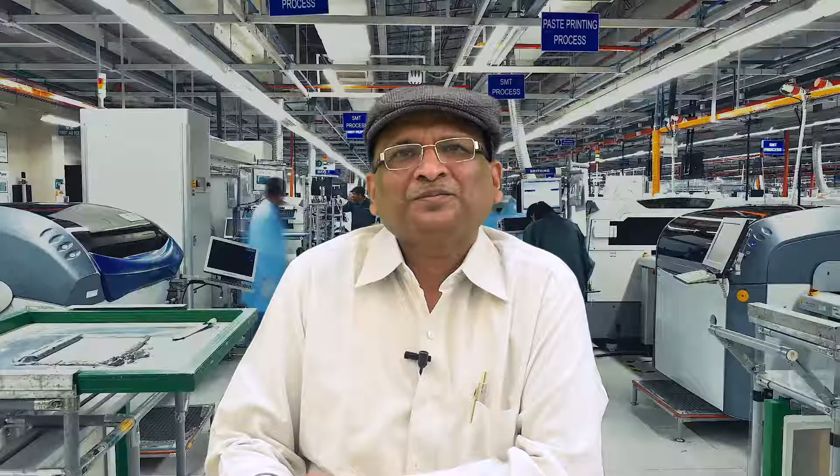When we discuss capacity planning, it is very important that we know the sequence of activities. First, through forecasting, we have customer demand. Then, through aggregate planning, we have production planning. And then finally, with MRP and capacity planning, we decide what capacity is required at our end. The management must plan the capacity of its process after deciding what products or services should be offered and how they should be made.

Capacity means the maximum rate of output for a process. Under capacity planning, the operation manager should have the decision-making capacity to cope up with present and future demand. Otherwise, the organization will miss the chance of growth and profit.

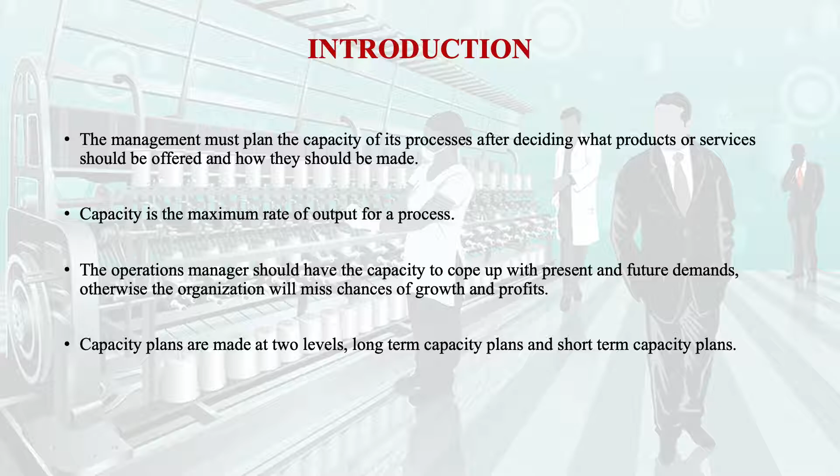Under capacity planning, there are basically two levels: first is long-term capacity plan and second is short-term capacity plan. Under the long-term capacity plan, we deal with investment in new facilities and new equipment, and these plans extend at least up to 2 years in the future.

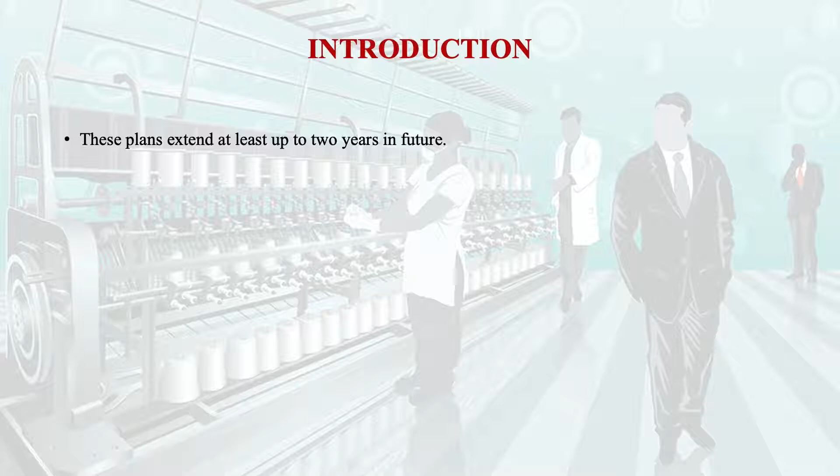Most Indian firms invest more than 600 billion yearly in new plant or equipment. Similarly, the service industry accounts for more than 68% of total investment. Such large investment requires very good management participation and approval because it cannot be reversed.

Short-term capacity plan focuses on workforce size, overtime budget, inventories, and other types of decisions that we will explore in later chapters or video sessions.

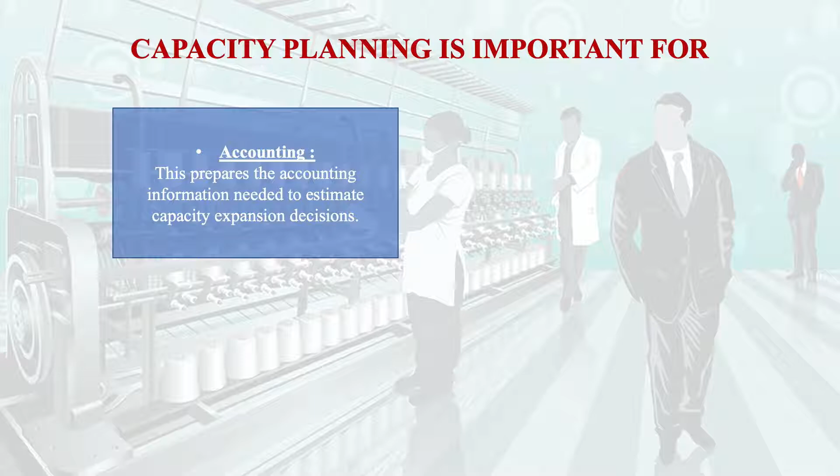Why is capacity planning important? It is important for accounting because it prepares the accounting information needed to estimate capacity expansion decisions. In finance, it performs a financial analysis of capacity expansion investment proposals and raises funds to support them. In human resources, it hires and trains employees to sustain the capacity plans.

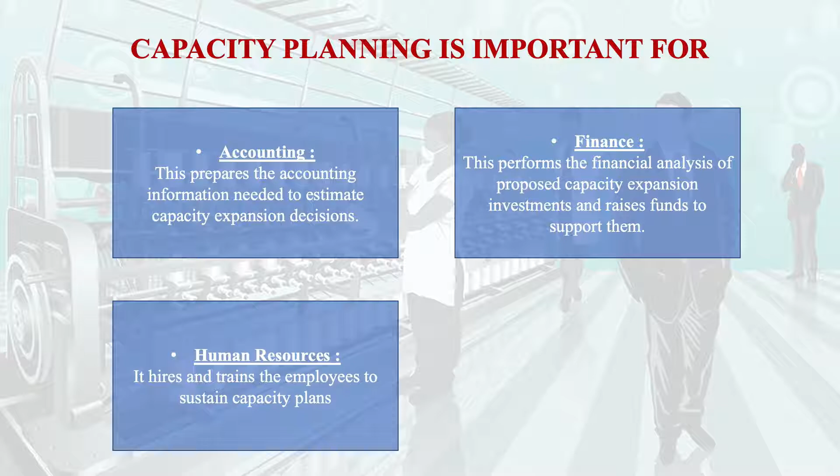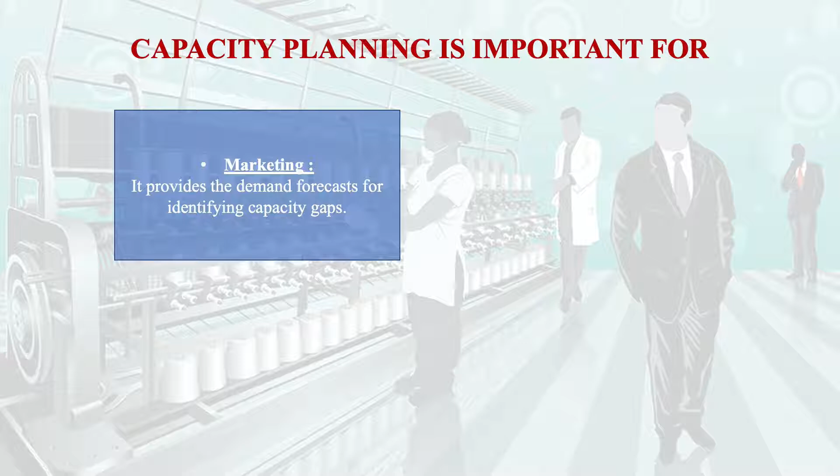In management information systems, it designs the database used in determining the work standard that helps in calculating capacity gaps if they exist in the existing plan. Then the most important is marketing, which provides the demand forecast for identifying capacity gaps. Then comes operations, which selects the capacity strategies that provide capacity levels to meet future demand most effectively. And then purchasing, which obtains outside capacity that is to be outsourced.

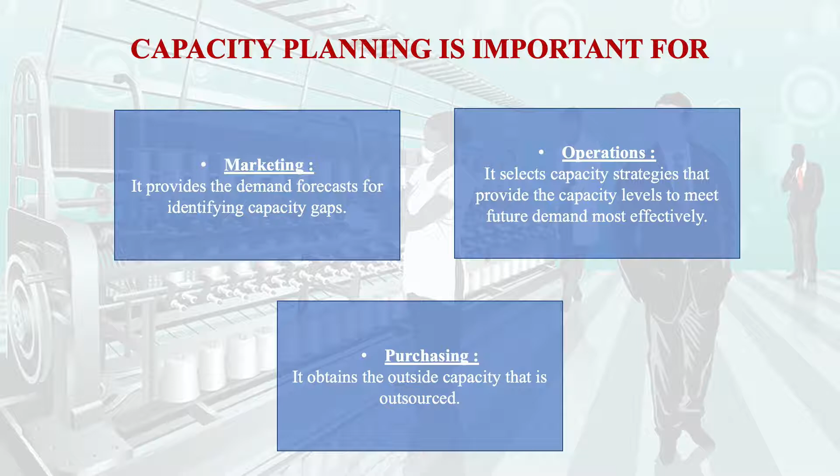Capacity planning is basically the central idea behind the success of any organization in the long run. While choosing the capacity strategy, the manager has to consider certain things in mind, such as how much cushion is needed to handle variable or uncertain demand.

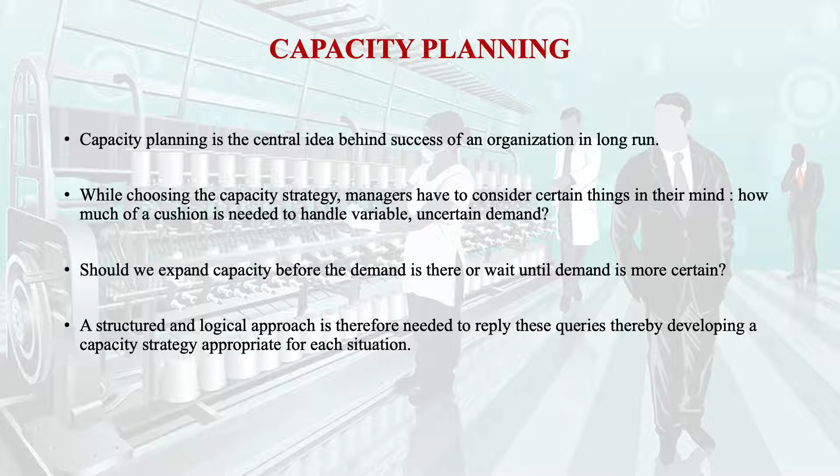Under the capacity plan, we also ask: should we expand the capacity before the demand, or should we wait until the demand is more certain? A structured and logical approach is therefore needed to answer these queries, thereby developing a capacity strategy appropriate for each situation.

So in today's session, we are going to learn the measures of capacity, how you will measure the capacity. We will also learn theory of constraints, though it will also be covered in a separate session. Then we will discuss economies and diseconomies of scale in case of capacity planning.

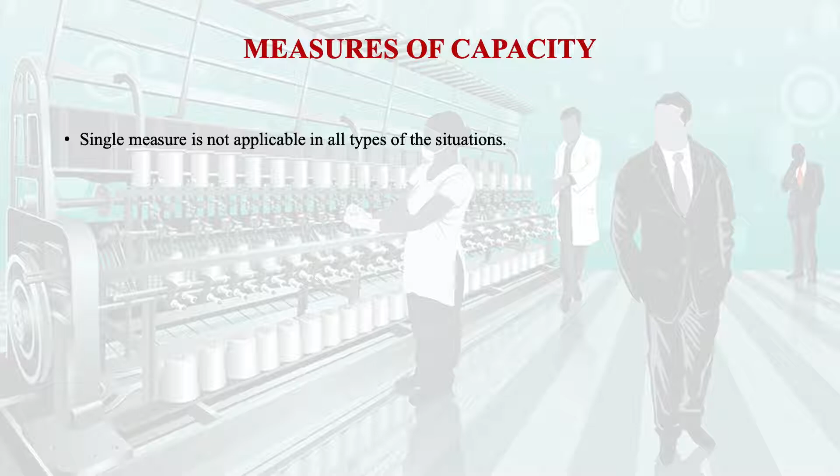The first important area under capacity planning is the measure of capacity. A single measure is not applicable in all types of situations. A retailer measures capacity as annual sales in rupees generated per square meter. Similarly, an airplane or airport authority measures capacity as available seat kilometers per month.

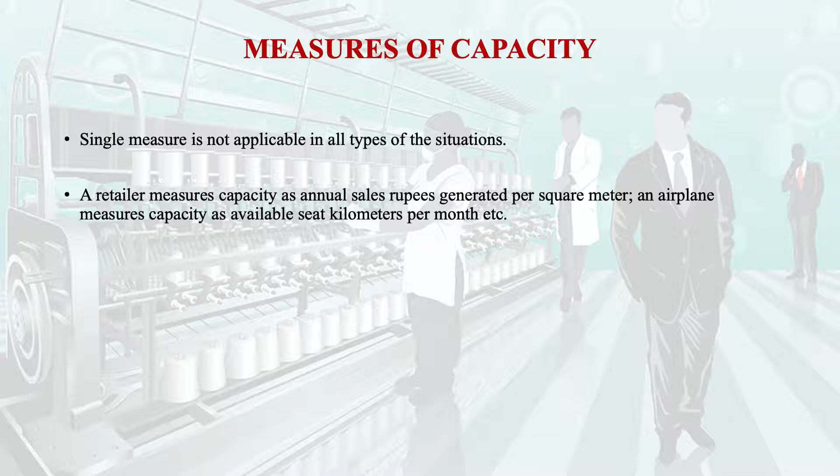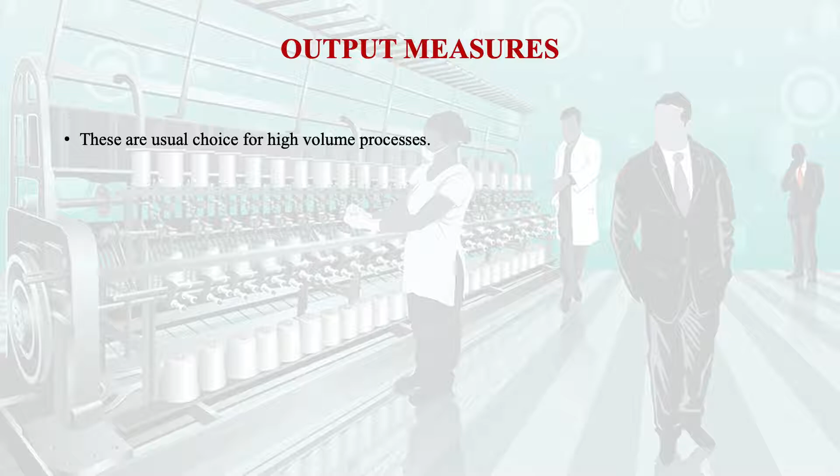In general, capacity is expressed in one of two ways. The first is the output measure, which is the usual choice for high volume processes. If a plant produces only a single item, for example a single type of vehicle, the measurement of capacity is very easy.

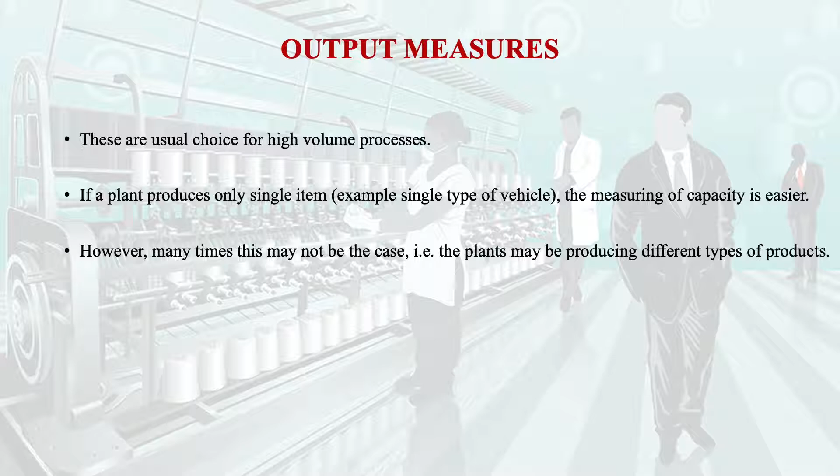However, many times this may not be the case, and the plant may be producing different types of products. For example, take any car manufacturer—they are not producing only one segment. There may be the economical car segment, medium class segment, higher class segment, and the luxury car. Besides that, there may be heavy duty vehicles. So all these are different.

Then what will be the output measure? We will decide that if it is an 800cc car, we will say it is 0.8 unit of passenger car. If it is a Wagon R type, we will say 1 unit. If it is a Ritz or Swift type, we will say 1.2. And similarly, for a higher class or even luxury class, we can say 2 units.

The car manufacturer will say that they are going to manufacture so many units of passenger car. They will not say economical car so much, medium car so much, higher class car so much. No, they will simply say this much unit of passenger car.

Under the output measure, as the amount of customization and variety in the product mix becomes too much, output-based capacity measure becomes less useful, as quoted in the example of the passenger car. Output measures are best used when the firm produces a relatively small number of standardized products and services, or when applied to individual processes within the overall firm.

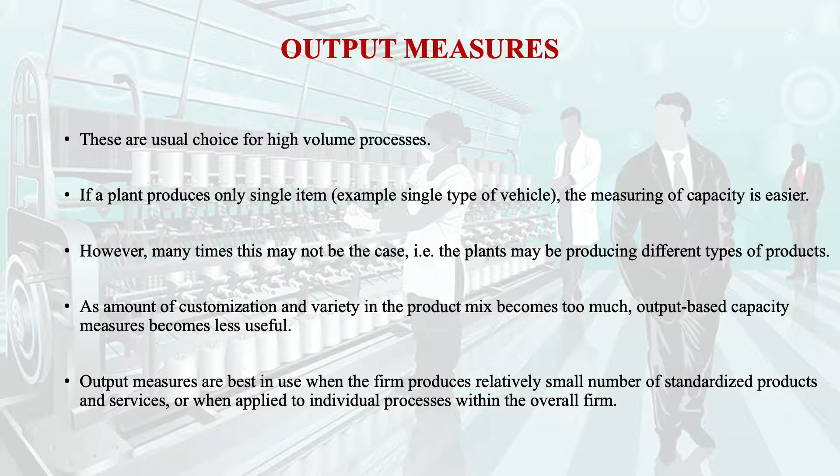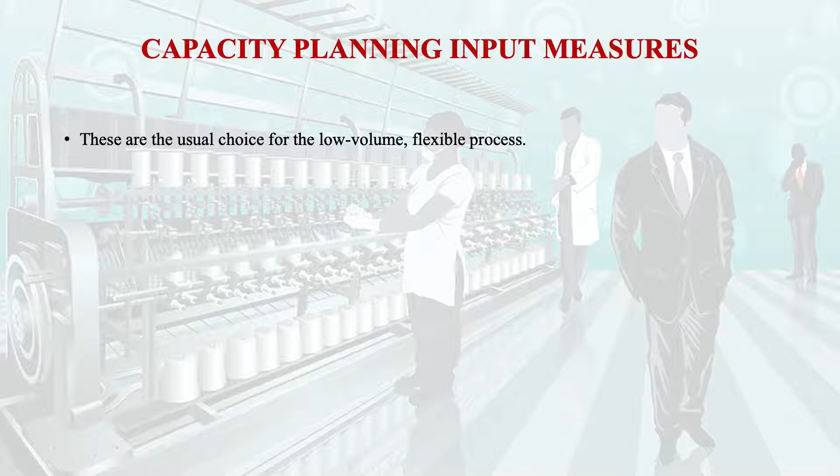Another type of measure is input measure. These are the usual choice for low volume and flexible processes. For example, in a photocopy shop, machine capacity can be measured as machine hours or the number of machines.

Just as a complicated product mix complicates the output capacity measure, the same can complicate the input measure. That means if we have multiple products, even in the case of input, the input measure will also become more complicated.

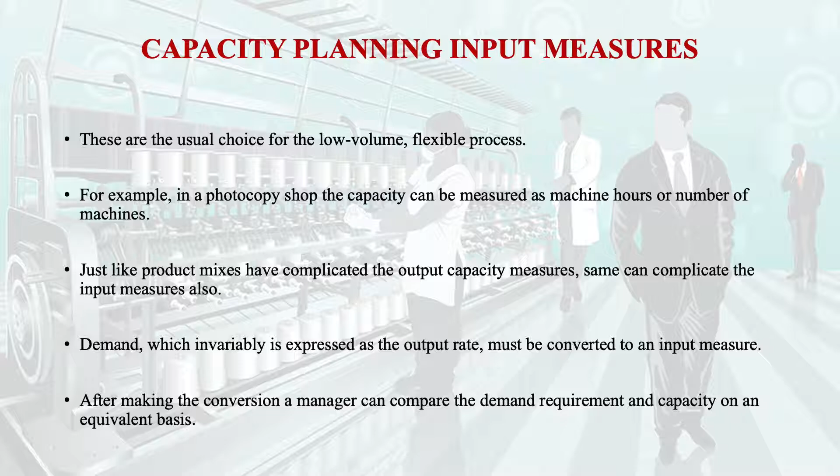Demand is important, and since it is invariably expressed as the output rate, it must be converted into an input measure. After making the conversion, a manager can compare the demand requirement and capacity on an equal basis.

Under capacity planning, an important term is utilization. Capacity planning requires knowledge of the current capacity of a process and its utilization. Therefore, utilization is the degree to which the equipment, space, or labor is currently being used.

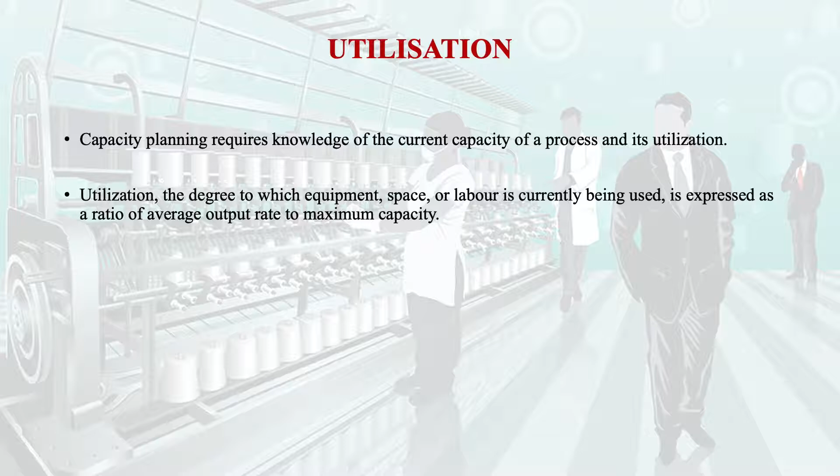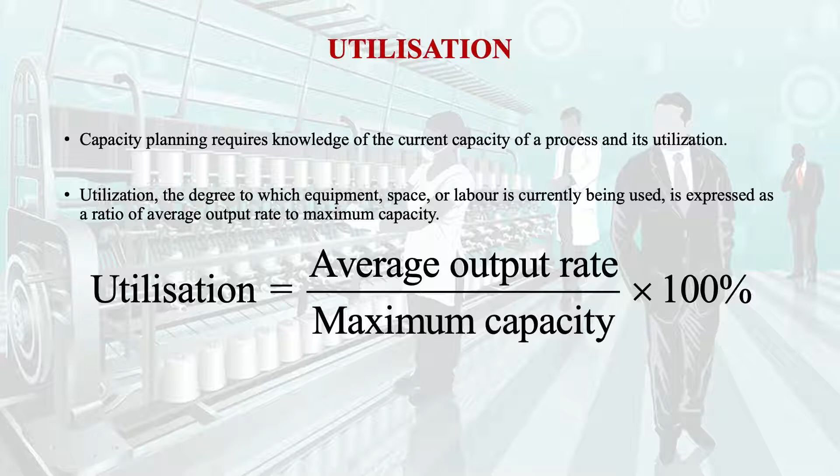If you want to express it mathematically, utilization is the ratio of average output rate divided by the maximum capacity rate, and the ratio is multiplied by 100, so we get the percent utilization.

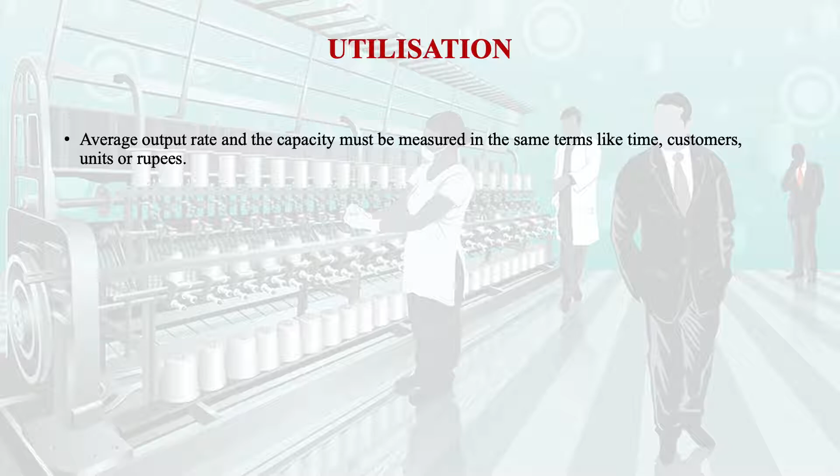The average output rate and the capacity must be measured in the same terms, like in terms of time, customer, units, or rupees. The utilization rate also indicates the need for adding extra capacity or eliminating unneeded or unrequired capacity.

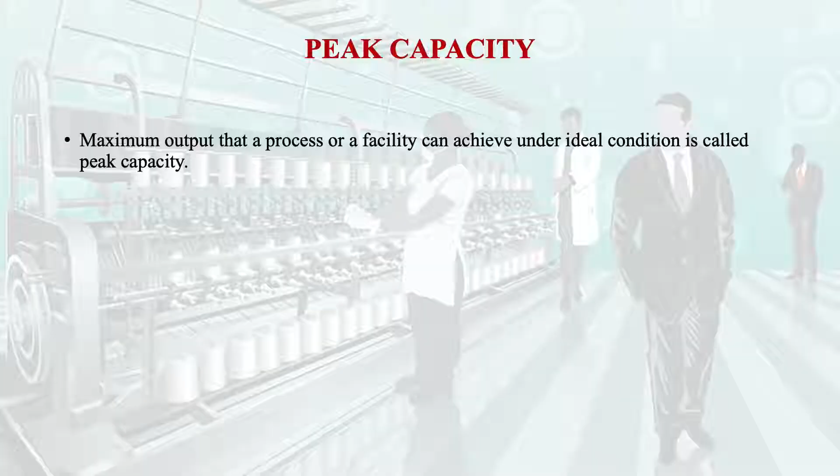We have two terms required to define the maximum capacity. The first one is called peak capacity. Peak capacity means the maximum output that a process or a facility can achieve under ideal conditions. That means if all things go well, then how much maximum can be produced, that is known as peak capacity.

That means our machine is running well, our workers are good and efficient, and all the materials are quality materials, then what output we will achieve, that is called the peak capacity.

When the capacity is measured relative to the equipment alone, the appropriate measure is called rated capacity, because it is relative only in terms of equipment.

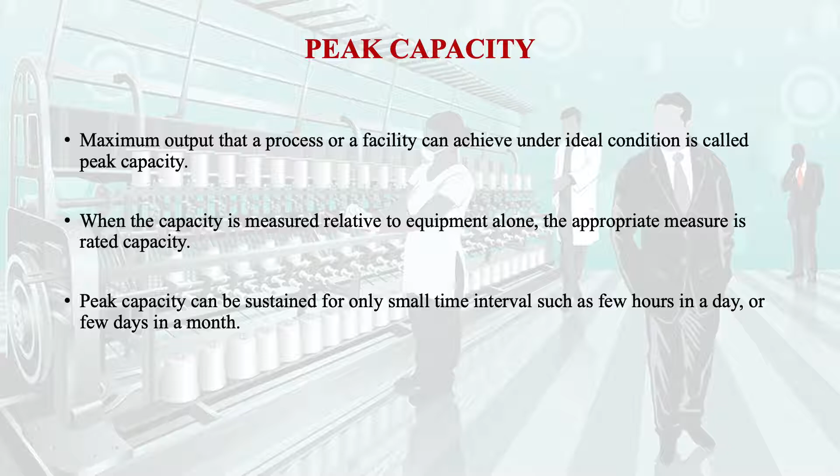Peak capacity can be sustained for only a small time interval, such as a few hours in a day or a few days in a month. For example, if production starts in the morning, as an industrial engineer you must appreciate that the worker will take time to gain the pace.

After a certain period, he will gain the pace, and at that time he will reach the peak capacity or the maximum capacity. After that, due to fatigue and the monotonous nature of work, the capacity will come down.

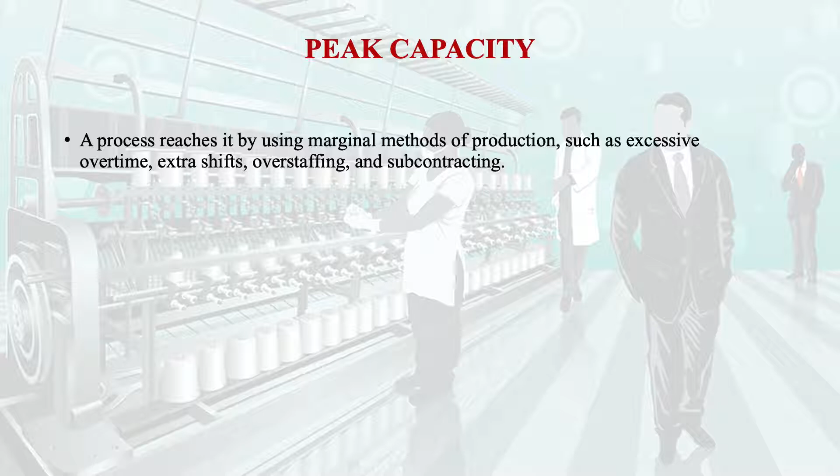A process reaches peak capacity by using marginal methods of production, such as excessive overtime, extra shift, overstaffing, and subcontracting. So these are the four types of alternatives by which we can achieve peak capacity, besides the short-term measures we used to take for achieving peak capacity.

Although these can help with a temporary peak, these options cannot be sustained for long. For example, if our demand is not going to be fulfilled, we will go for overtime, extra shift, or overstaffing. We can even go for a make-or-buy decision, that is subcontracting, so that we are able to meet the timeline.

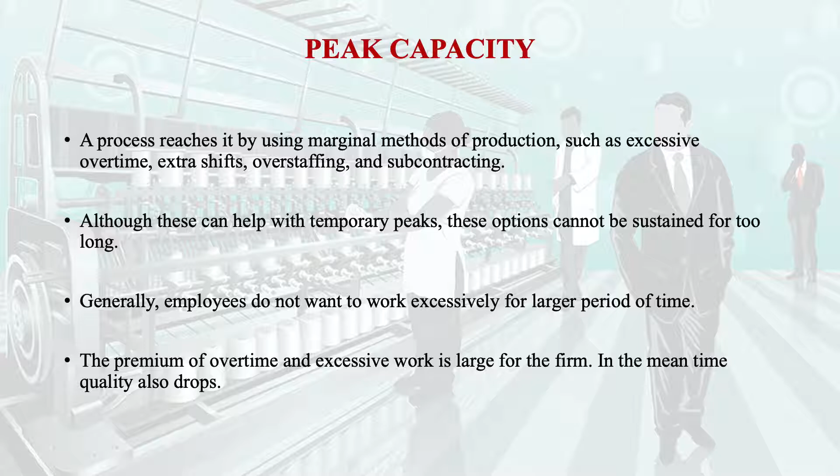Generally, employees do not want to work excessively for a longer period of time. The premium of overtime and excessive work is large for the firm. In the meantime the quality also drops. If you force the workers for extra time, for overtime, then definitely the quality will suffer.

The second important type of capacity is the effective capacity. The maximum output that a process or a firm can sustain under normal operating conditions is called effective capacity.

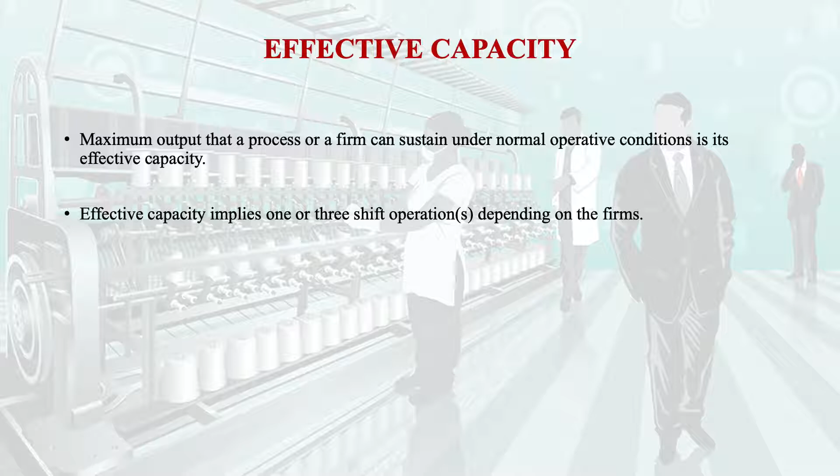When we are going for ideal capacity or ideal conditions, then we get the peak capacity. Under normal operative conditions, we get the effective capacity. That means effective capacity implies one, two, or three-shift operation depending on the firm. In a normal course, any factory normally has one shift, two shifts, or three shifts. So these are the normal conditions.

For this reason, capacity is defined as the greatest level of output the firm can reasonably sustain by employing realistic employees, schedules, and equipment currently in place. When the firm is running close to the peak capacity, it can make minimal profit or can lose money despite a high level of sales.

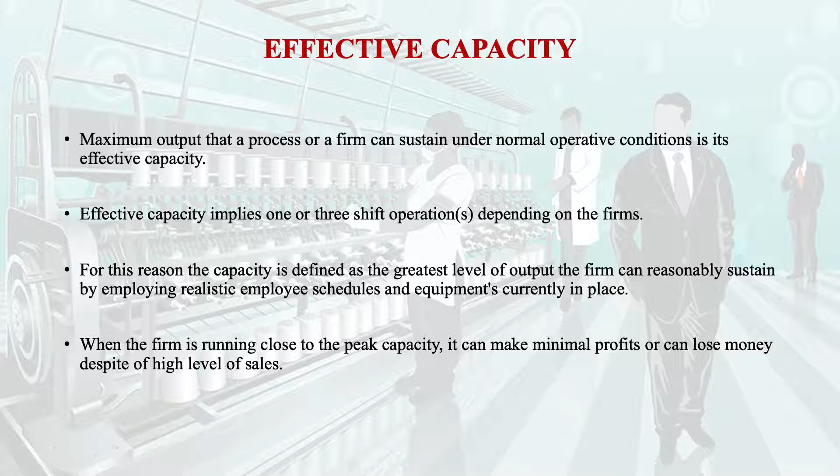So one should understand that it is easy to achieve the peak capacity, but there are some consequences when we achieve the peak capacity by overstaffing or by overtime.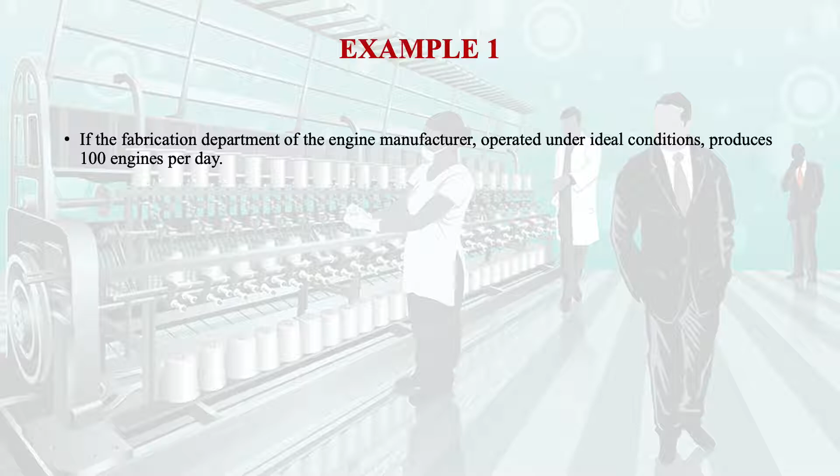If we take one example, if the fabrication department of an engine manufacturer operated under ideal conditions, it produces 100 engines per day.

Management believes that a maximum output rate of 45 engines per day can be sustained economically over a long period of time. The department is currently producing an average of 50 engines per day.

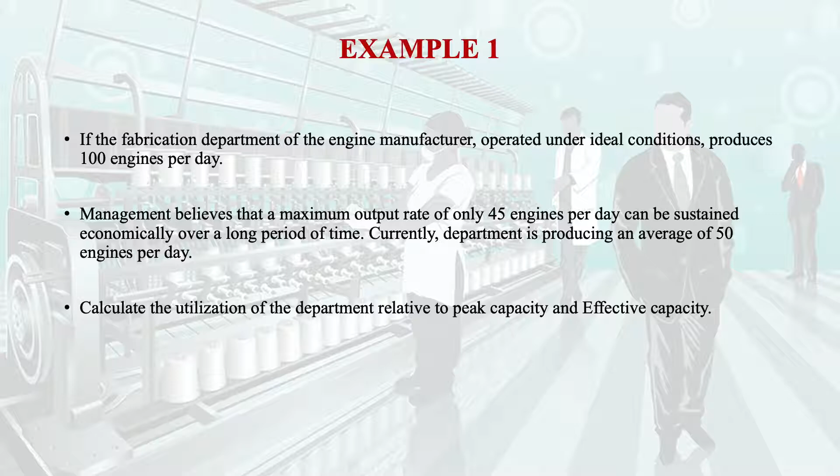So there are two different utilization measures. The first one is utilization at peak. We have 50 divided by 100, so we are using only 50%.

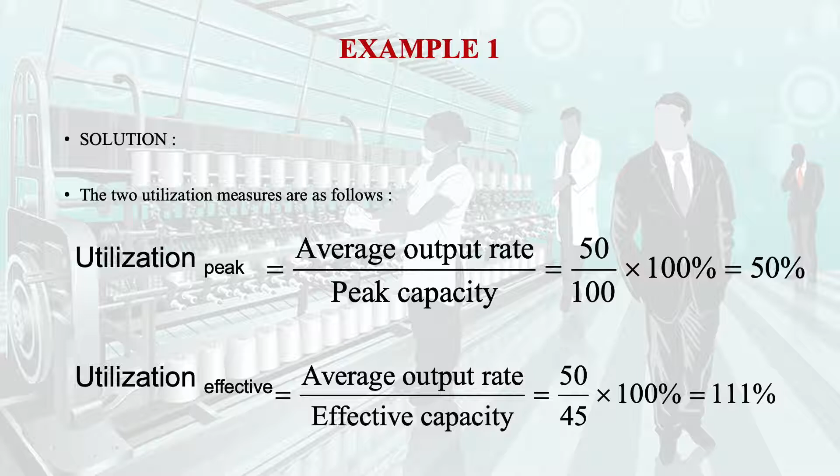In another case, when we look at effective capacity, average output is 50 and effective capacity is 45, so it is 111% utilization of the capacity.

We were discussing how to increase the maximum capacity, because that is the interest of any top management, since every time management wants to go for the peak capacity. Suppose we are working at effective capacity. Now, how will you go from effective capacity to the maximum capacity?

For performing most operations, multiple processes are involved, and their effective capacities are not identical. This is one situation. The system's output is depreciated by the bottleneck operation. The bottleneck operation is the operation having the lowest effective capacity in the process.

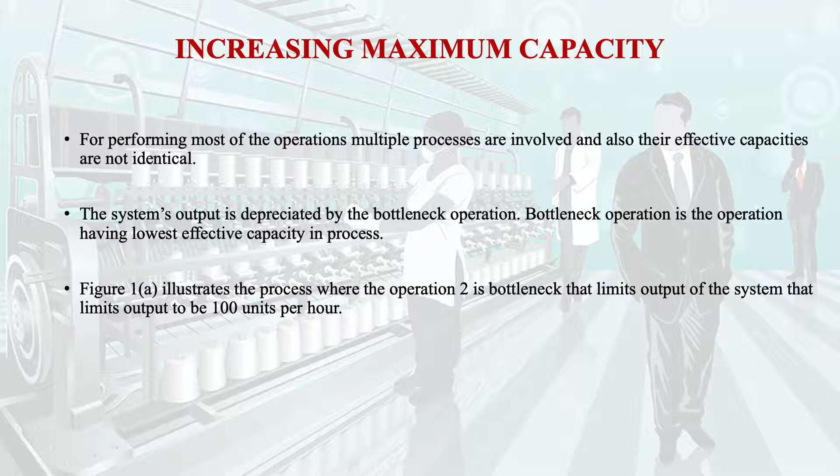So the bottleneck process always tries to hinder achieving the maximum capacity. So we have to control that bottleneck portion of the process.

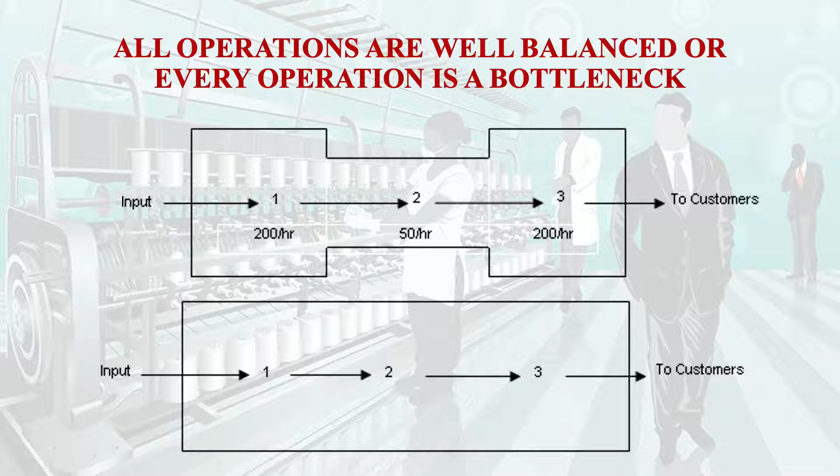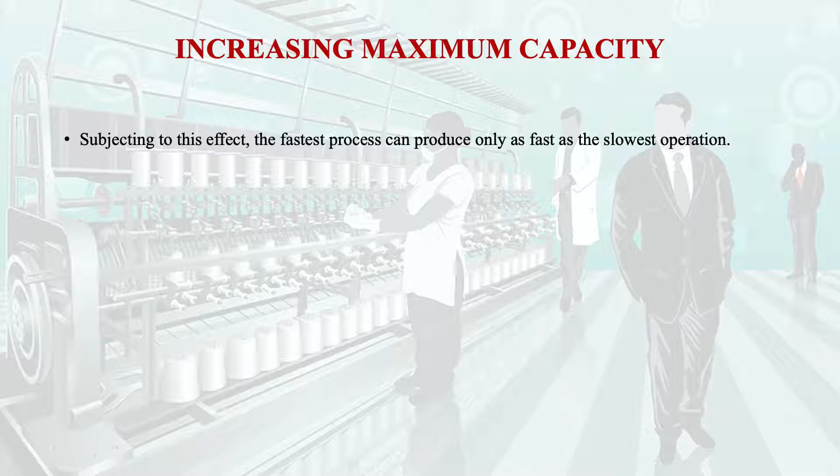Subject to this effect, the fastest process can produce only as fast as the slowest operation. Just appreciate this: if the fastest operation is producing 10 items per hour and the slowest process is producing 2 items per hour, then the speed will only be 2 items, because other items have to wait since the slowest operation cannot speed up its process.

That is why it is called the bottleneck process. We have also shown through figure 1b where all the operations are well balanced, or in other words, every operation is a bottleneck.

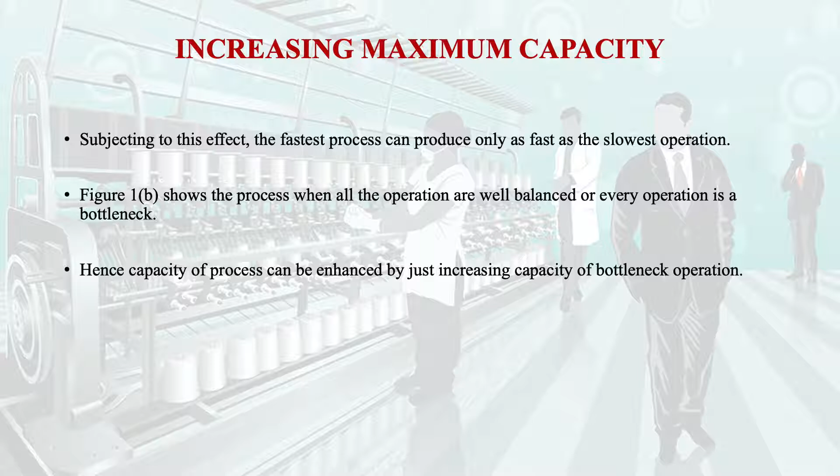Hence, the capacity of the process can be enhanced by just increasing the capacity of the bottleneck operation. We have also seen that if we increase the capacity of operation 2, which is the bottleneck, without disturbing the operation capacity at points 1 and 3, then we can increase the total output capacity.

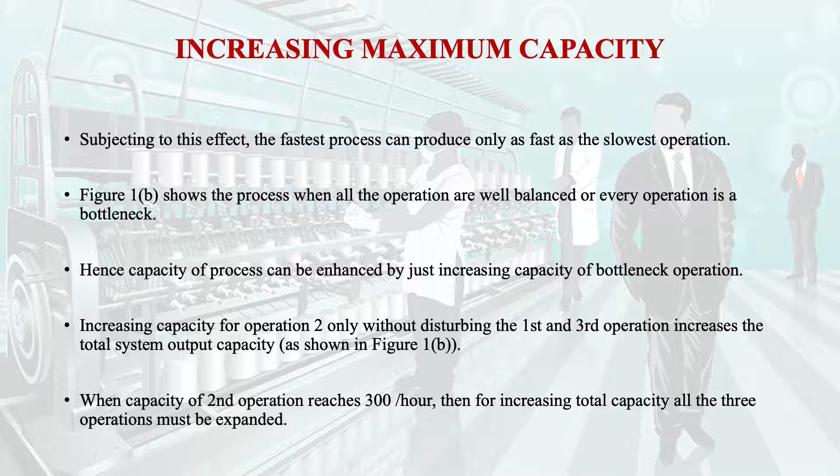When the capacity of the second operation reaches 300 per hour, then for increasing the total capacity, all three operations must be expanded. Here I just want to clear one thing: when we are increasing the capacity of the bottleneck, that should be synchronized with the other operations also.

Now we will just see what is the theory of constraints. There will be a separate video session on the theory of constraints, but since the theory of constraints is a very important topic in capacity planning, that is why we are taking a brief or short overview of that theory of constraints.

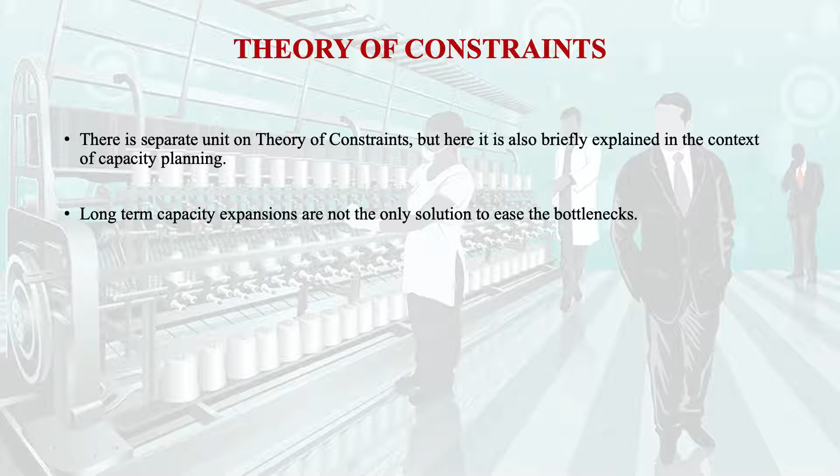Under the theory of constraints, long-term capacity expansion is not the only solution to ease the bottleneck. Short-term options during peak periods involves hiring temporary persons, temporary employment, or part-time employees, or we should outsource. These are some of the alternatives which are short-term actions.

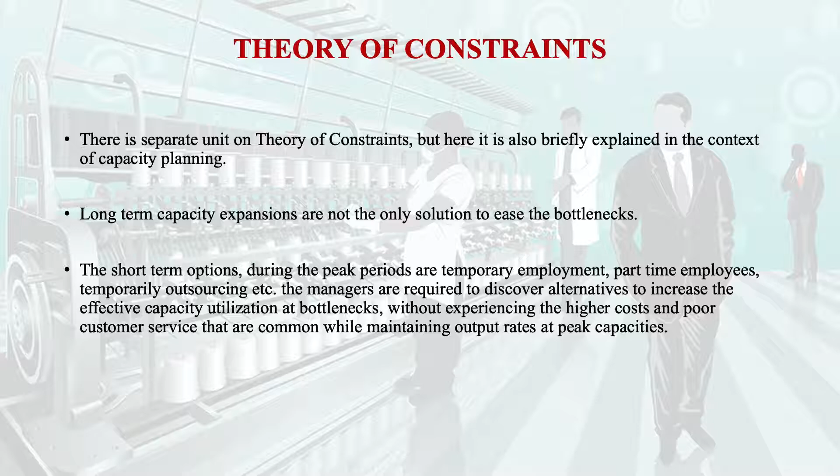Managers are required to discover other alternatives to increase the effective capacity and utilization at the bottlenecks without experiencing higher cost or poor service level that are common while maintaining the output rate at peak capacity. Here you will recall that whenever we want to increase the effective capacity, there are chances of lowering the quality of the product or item.

When we are going for increasing the maximum capacity, this can be resolved if we carefully monitor the short-term schedule. We should keep the bottleneck resources as busy as possible. That means if the bottleneck is set for 5, we should not lower down the capacity. We should always make them busy by giving them 5, or we are getting 5 units per hour.

The common practice adopted by managers in this situation is to minimize the time lost at bottlenecks because jobs or customers are delayed at the upstream operation in the process, or because the necessary material is temporarily unavailable, there is then a problem in the bottleneck operation. So one should avoid this and try to exploit the maximum capacity of the bottleneck operation.

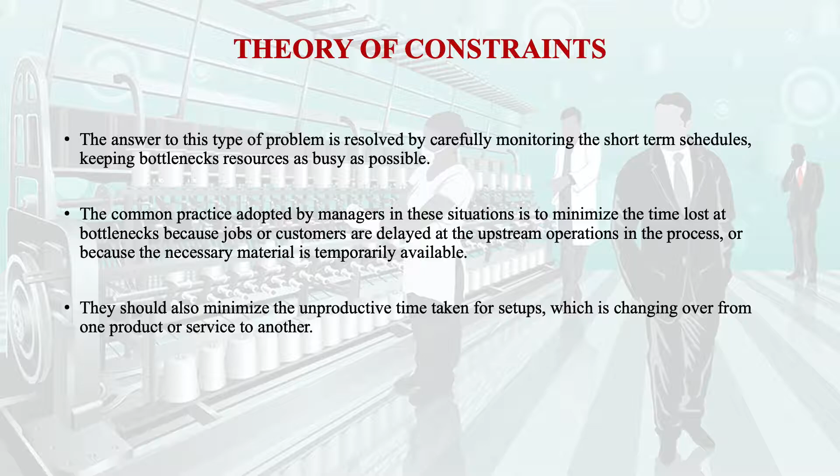Another important point: they should also minimize the unproductive time taken for setup, which is changing over from one product to another product or one service to another service, because setup time is another time-consuming factor. So one should prepare itself or the machine for the changeover.

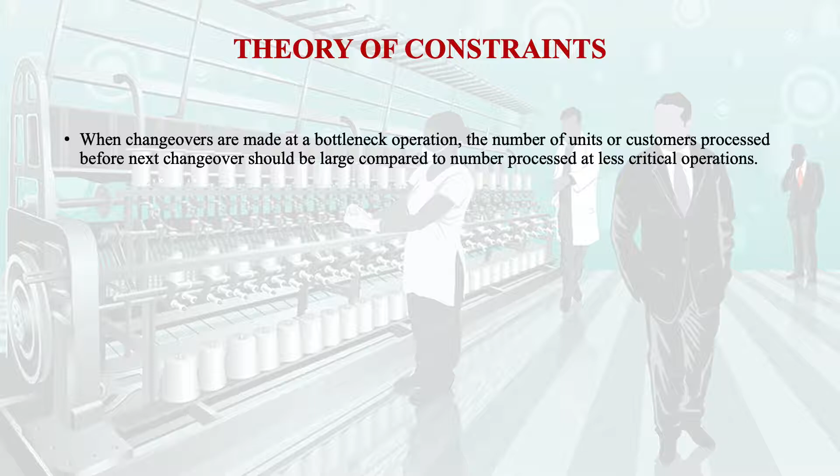When the changeovers are made at a bottleneck operation, the number of units or customers processed before the next changeover should be large compared to the number processed at less critical operations. Therefore, maximizing the number processed per setup means there will be fewer setups per year, and thus less time will be lost in setup.

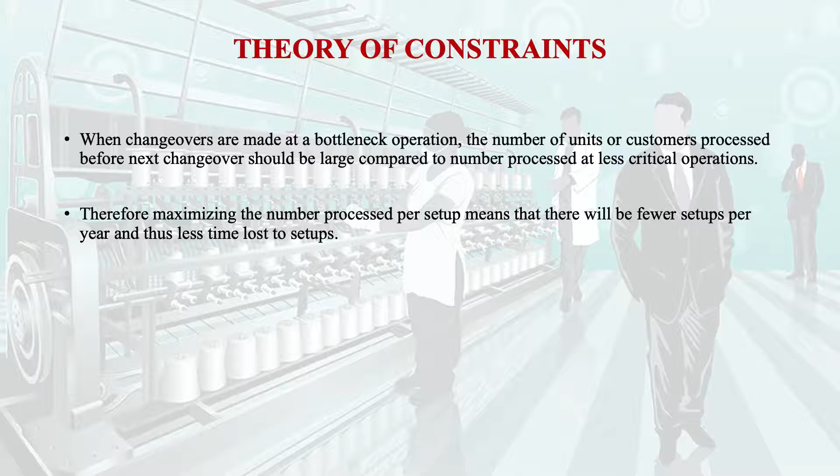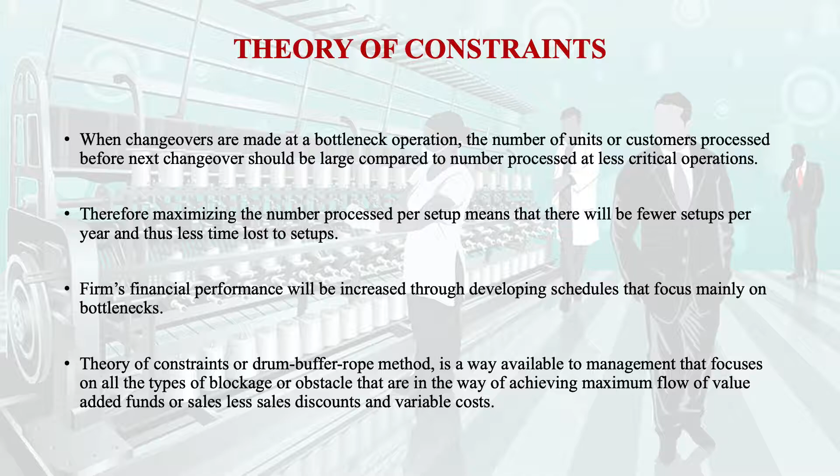If we talk about financial performance, it will be increased if we develop the schedule by mainly focusing on the bottleneck. Theory of constraints, also called the drum buffer rope method, is a way available to management that focuses on all types of blockage or obstacles that are in the way of achieving maximum flow of value-added funds, or sales less sales discount and variable cost. That means whatever we are going to achieve from the bottleneck operation, that should be given top priority.

If we talk about the blockage or impediments, they must be overloaded. If we say overloaded, that means in other words they should not be underloaded, that if the capacity is 100, it should run at 100 capacity. Whether it is a new entry, a new product development, or a change in manufacturing operation, we should always consider and look at that the blockage or impediment should not be underloaded.

The central idea of this theory is to focus on the blockage or bottleneck to increase the throughput, by increasing the flow of total value-added funds, that is the throughput. If we are increasing the total flow, that means we are increasing the throughput. Therefore, the performance of the overall system lies in the scheduling of the bottleneck.

It is very important to note that if we are managing the bottlenecks by properly scheduling them, we can maximize the throughput of our products or services in accordance with the promised completion date, which we have already promised with our client or customer.

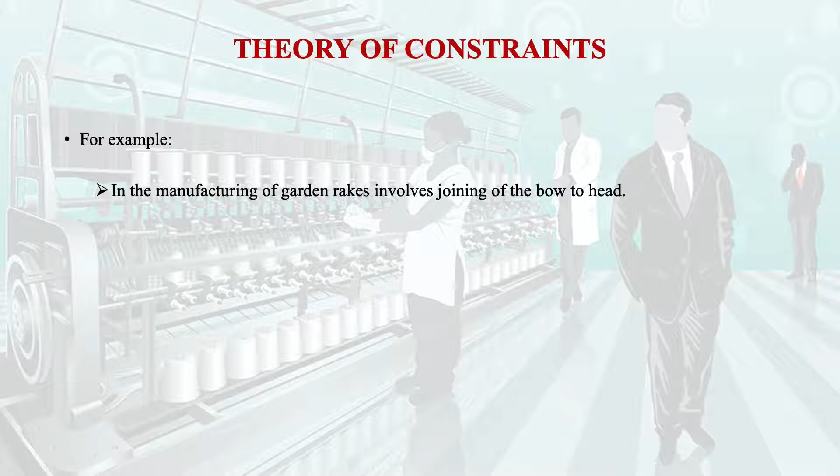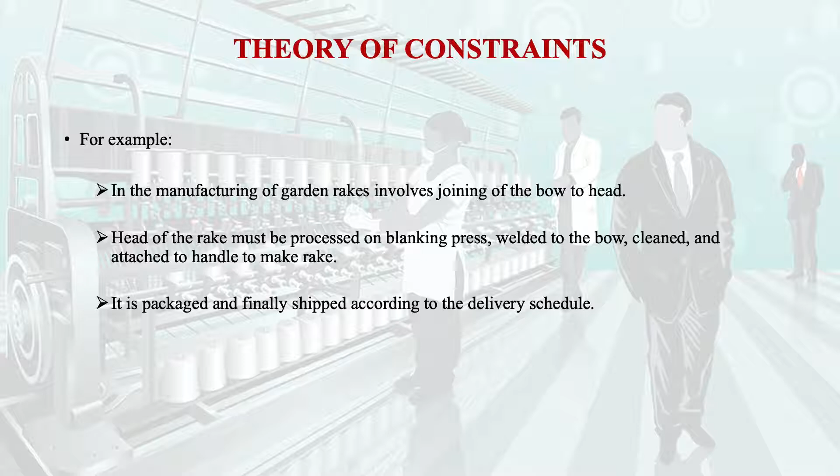For example, in the manufacturing of garden rakes, it involves joining of the bow to the head. The head of the rake must be processed on a blanking press, welded to the bow, cleaned, and attached to the handle to make the rake. It is packaged and finally shipped according to the delivery schedule. So here we have to find what is the bottleneck and schedule it properly.

The blockage or impediment might be overloaded, as we have already said, and the central idea behind it is that we have to give the total value-added funds priority and we have to increase the throughput time.

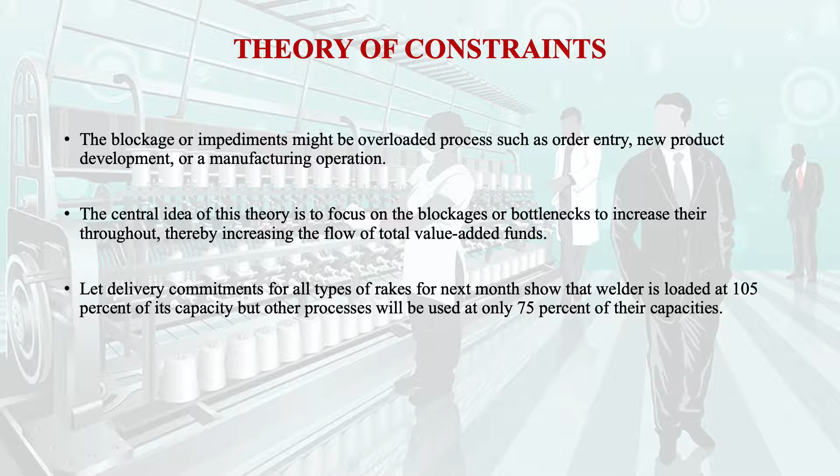If the delivery commitment for all types of rakes for the next month shows that the welder is loaded at 105% of its capacity, but the other processes will be used at only 75% of capacity, according to theory of constraints, the welder is a bottleneck resource, whereas blanking, cleaning, handle attaching, packaging and shipping processes are not the bottleneck resources.

Therefore, the welding should be properly scheduled. First, there should not be any idle time at the welder end, and if there is any idle time, that is the lost opportunity to generate the total value-added funds or increase the throughput time.

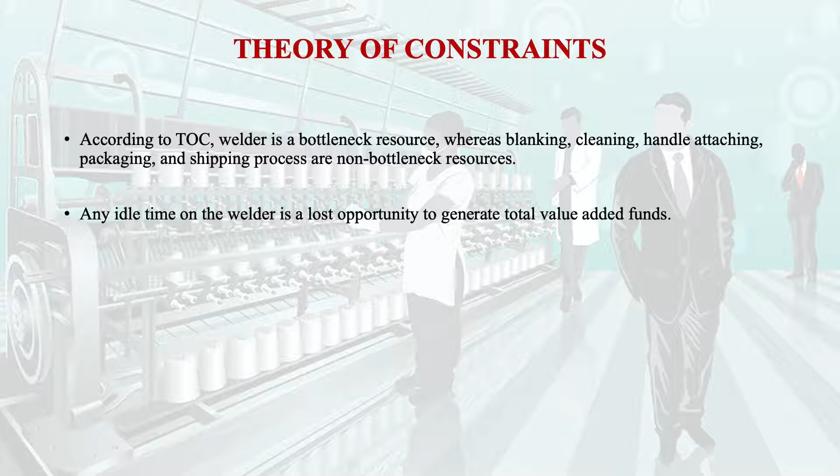In order to maximize the throughput of the rake manufacturing system, the manager should focus on the welder schedule, or in other words, the bottleneck schedule. This is how the theory of constraints finds application.

We have put this in several steps. The first step is to identify the system bottleneck. If I take the example of rake manufacturing, the bottleneck is the welder, because it restricts the firm's ability to meet the shipping schedule and hence the total value added funds.

Second step, we should exploit the bottleneck. That means there is a need to develop a schedule that maximizes the throughput of the bottleneck. In the rake example, there is a need to maximize utilization at the welding end while meeting the shipping commitment to the possible extent.

The third important step is to subordinate all other decisions to step 2. Recall step 2, which is about scheduling the bottleneck. Whatever decisions subordinate to the welding operation should be properly handled. Resources that are not the bottleneck should be scheduled to support the bottleneck's schedule, and they should not produce more than what it can easily handle.

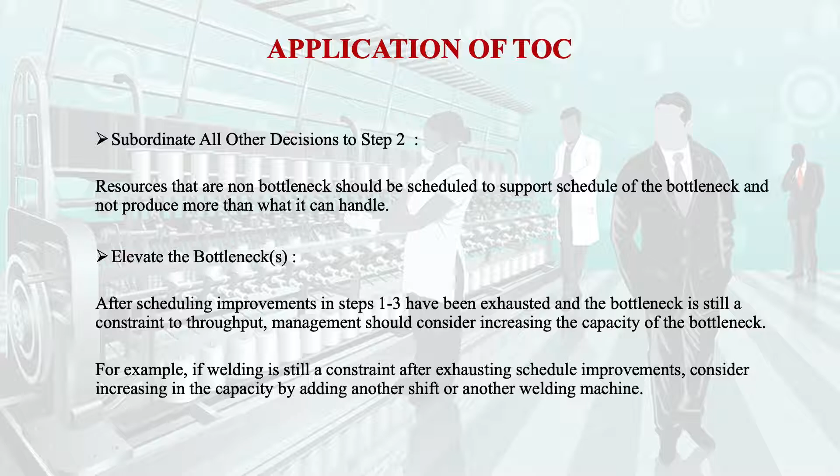For example, if welding is still a constraint after exhausting scheduling improvements, consider increasing capacity by adding another shift or by adding another welding machine. There are two alternatives: either have another shift of 8 hours with the same machine, where the same or a different operator works the other shift, or buy another welding machine with another operator so that we may have extra capacity.

We are discussing different alternatives to tackle the bottleneck operation. The first alternative is scheduling, and the second is increasing the capacity.

And if we are not able to see results from all these actions, then the most important thing is that inertia should not come in the way of handling the bottleneck. So actions taken in steps 3 and 4 should be considered carefully, as they will improve the welder's throughput and may alter the loads on other processes.

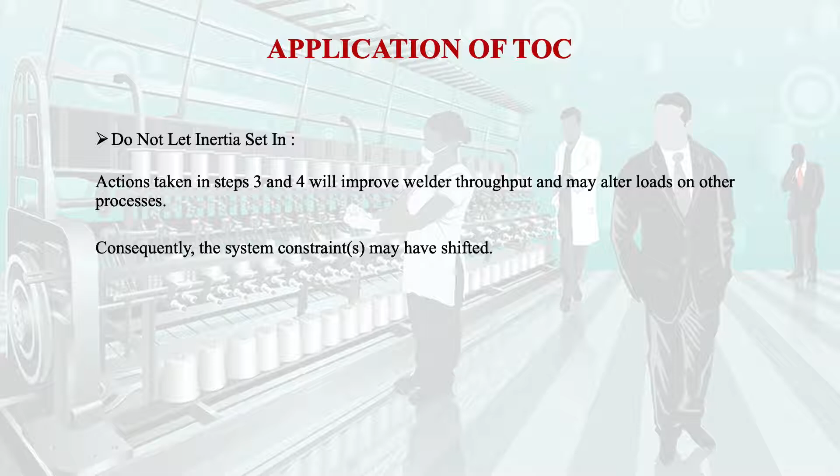Another option is that the system constraint may shift to another place, so that we should not get trouble from the bottleneck operation.

Capacity planning is a very important topic which we have discussed in today's session. By making a plan for capacity, we decide how much capacity we have and how much capacity we need to meet customer demand. For example, if we are getting more customer demand, more capacity is required, and if we are getting less demand, then it is quite possible that our capacity will remain unutilized.

We have discussed the term utilization in terms of average capacity and in terms of peak capacity, or the effective capacity. We have also gone through certain important aspects of theory of constraints in this session, and the most important point is consideration of the bottleneck. In every operation or process, we always get a bottleneck operation, which makes the whole process slow. That means whatever the speed of the bottleneck operation, that will be the speed of the overall operation. Therefore, it is required to handle the bottleneck operation carefully.